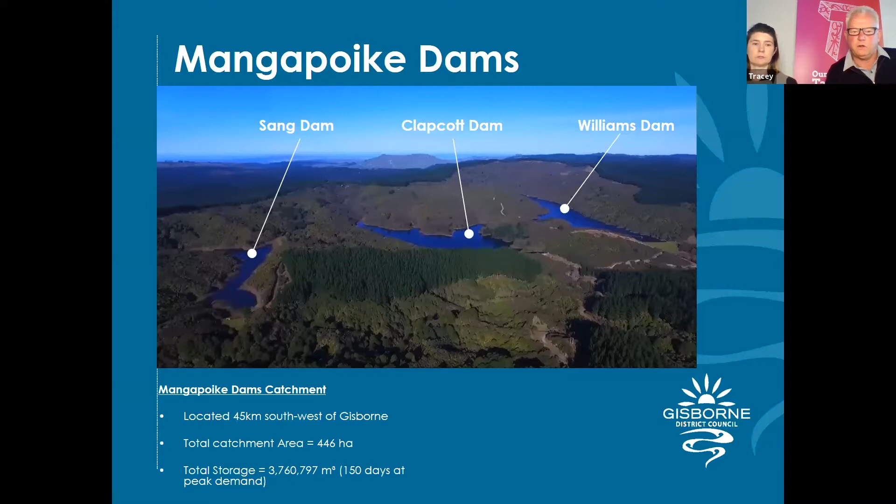Our main dams are the Mangapoike Dams. The Williams Dam on the right hand side is our largest. The Clapcott Dam is the oldest, and the Sang Dam feeds into the Clapcott. There's a total catchment area there of just under 500 hectares, mostly bush and mostly well protected.

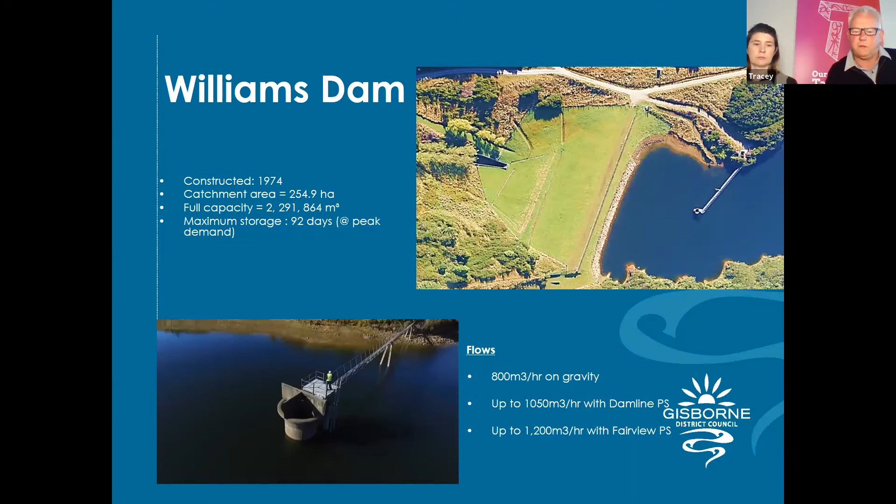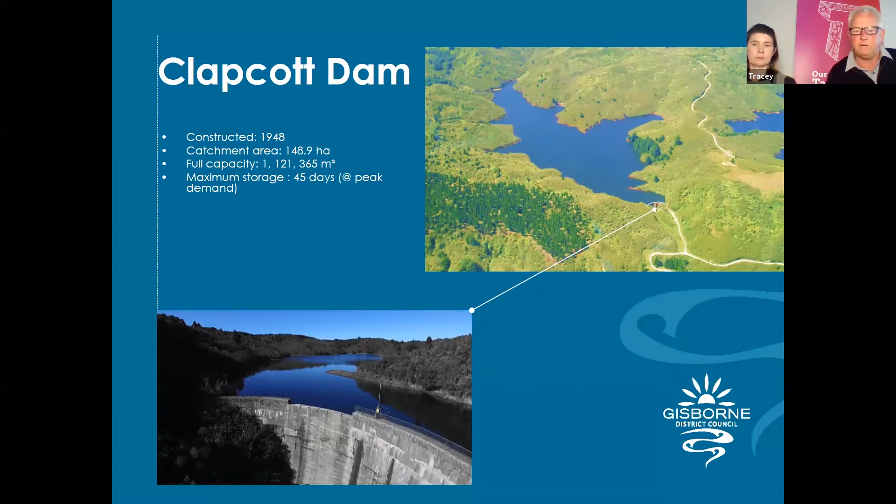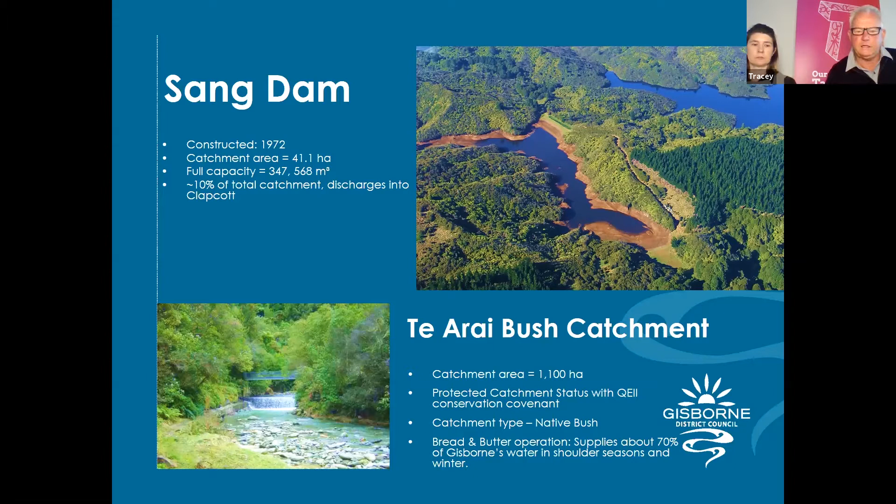The Sang Dam feeds into that dam, and has about 10% of the catchment. The majority of our water comes from the Te Arai bush catchment, which is a protected catchment with a QEII covenant on it. It's predominantly native bush, and that supplies about 70% of Gisborne's water. It does go dry in summer, and that's when we start using the dams and the other treatment area, which I'll move on to next.

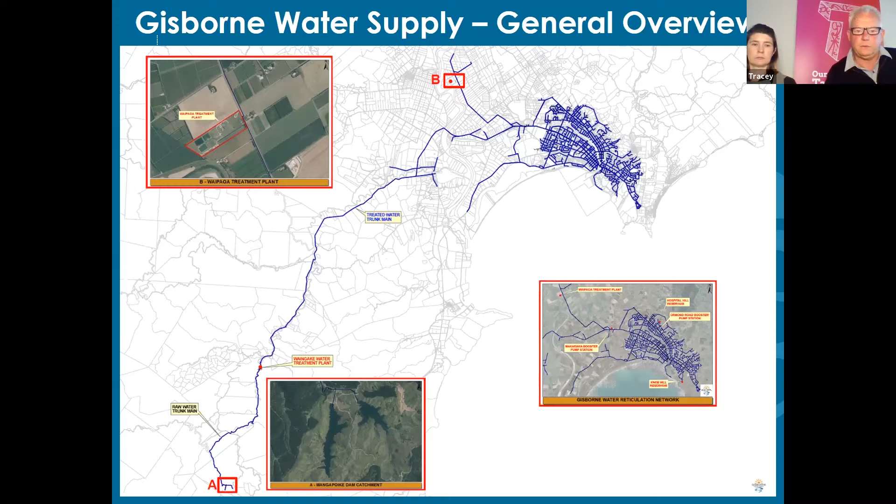So the first treatment area from the dams and the bush intake is the Waingake treatment plant. It was built in the 1940s. It was extensively upgraded after Bola in 1990 - we had quite a few issues after Bola, especially with the main line breaking into Gisborne. It supplies most of the water demand. It has different processes: clarification, filtration, coagulation, and there's also a chlorine input.

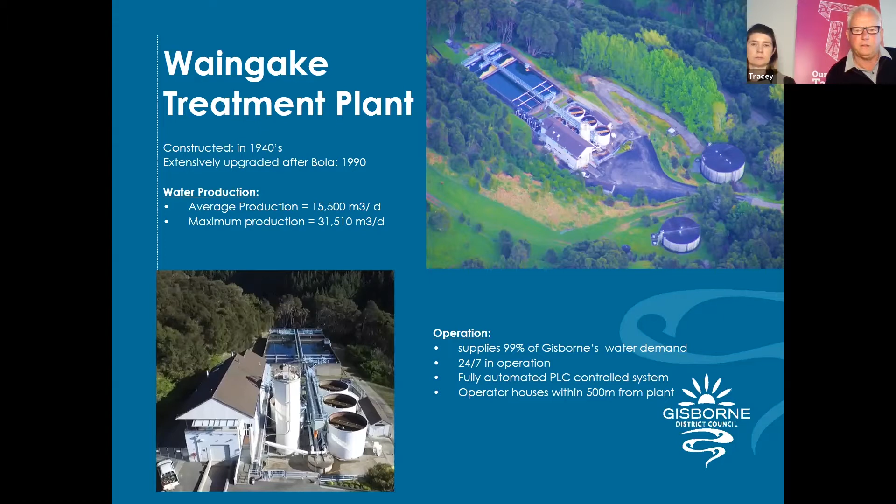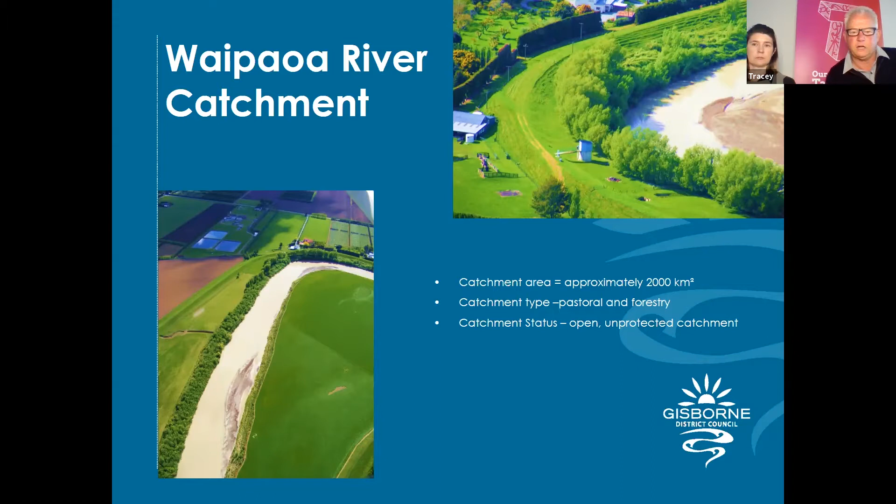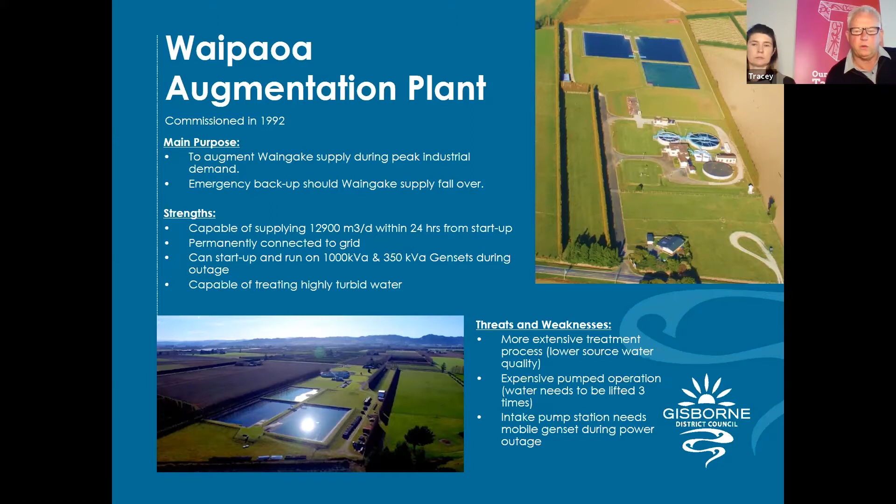There's another picture of the settlement ponds and the treatment building on the right hand side. Again there's settlement, filtration, coagulation, filtration, and we're currently installing a softening plant because the Waipaoa water is harder than the bush intake water.

And there's another reservoir on Knob Hill, substantially smaller, about a quarter of the size, still a substantial reservoir, and that's slightly lower so the water can flow into that reservoir.

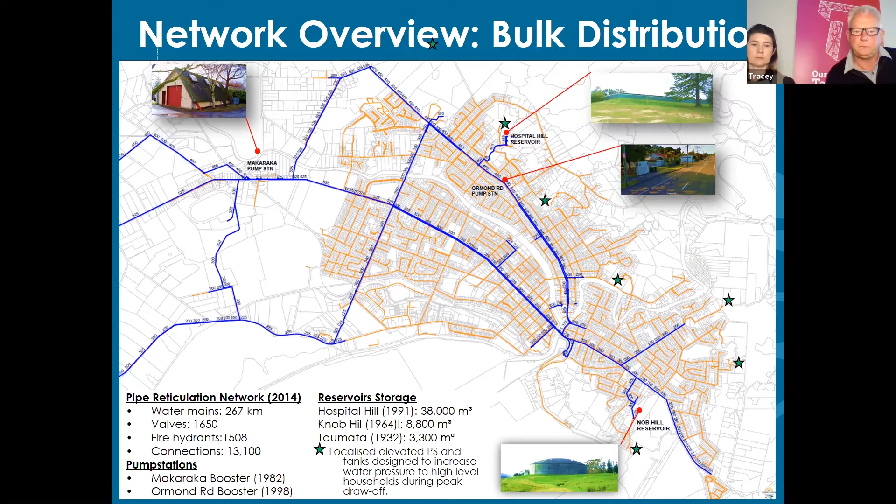Because we're an essential service, we have to supply water 24/7, and there's components of our network that could fail. So one of the big issues at the moment is the aging asbestos cement water lines - we have a significant amount of those, and they're slowly deteriorating and crumbling, so we get quite a lot of water leaks from those. We've got a progressive program of replacing them.

We prefer to use polyethylene pipe or PVC just because it's more ductile - it means it can move around a bit more if there's an earthquake without failing. As you can see, we've got quite a network of mains and rider mains, and quite a lot of valves, which are the dots in those pictures. So if anything does go wrong, we can isolate sections and still feed other sections of town.

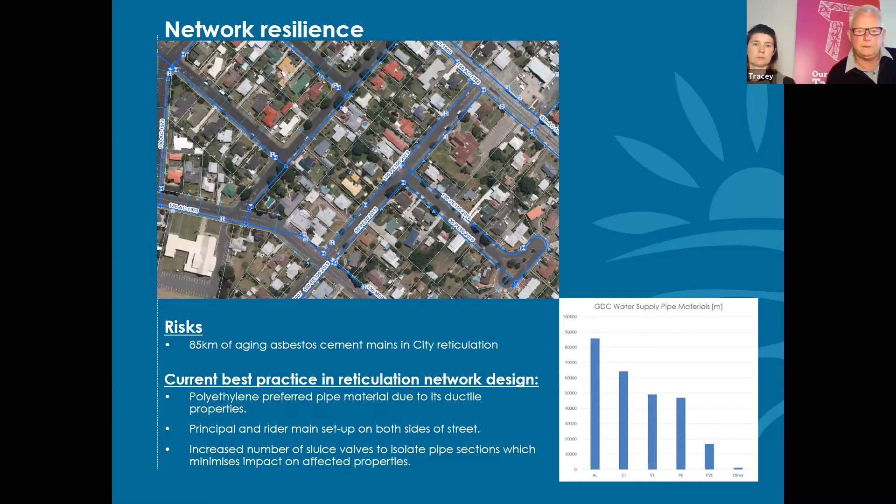In terms of resilience, we also have some interdependencies. If the roads are out, we have issues, especially that Waingake Road, but also Bushmere Road where the Waipaoa plant is. There are a number of bridges as well, and pipe bridges where we cross with our main pipelines, which are susceptible to flooding and scour.

We have an extensive generator network, gen sets, just to make sure that even when the electricity goes out, we can still supply water. Everything we have is on an alarm system, a SCADA system, and we use that for monitoring when things go wrong.

We also have fuel dependency because we've only got limited diesel storage at treatment plants. It was noticeable this year with COVID - big demand on diesel and petrol, and we had to work our way around that using our civil defence partners.

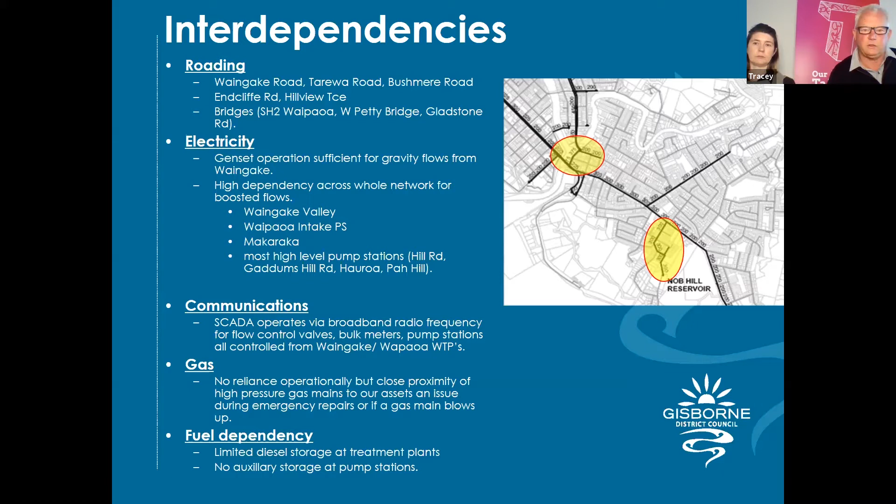That pretty much wraps it up for me for the water supply. You'll be able to ask some questions soon, and I'll hand you over to Wolfgang Kanz, who's going to talk about where some of the water goes.

Kia ora koutou. I'm going to be talking to you today about the DrainWise program, which is the council work program aimed at reducing how often we have wastewater overflows into the rivers in the city.

So why do wastewater overflows take place? In heavy rainfall, we have rainwater entering our wastewater system. As you know, rainwater is not supposed to get into the wastewater system, but in heavy rain events that does take place. When that rainwater gets into the wastewater pipes, those pipes get too full and can no longer convey that water to the treatment plant. The pressure builds up in that network, which means no more wastewater can get in.

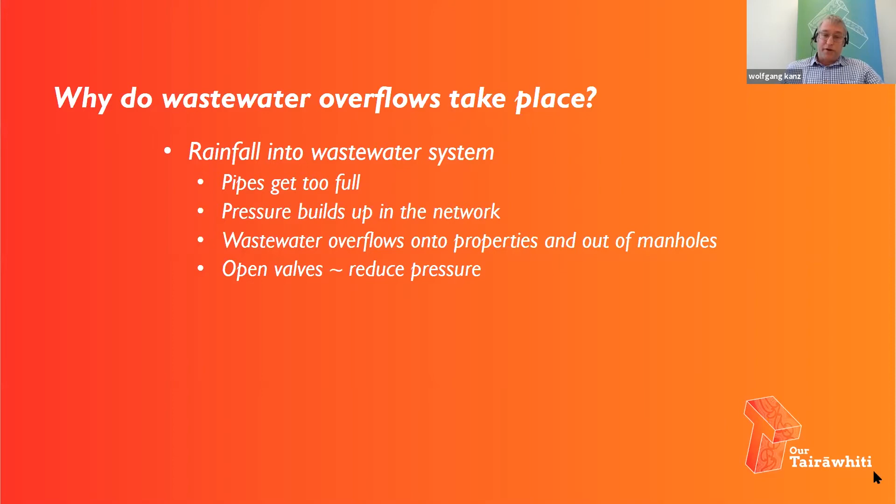So how often does it happen? It happens generally between 1 and 4 times per year, so up to 4 times a year.

Our target through this LTP process is to reduce that frequency of overflow from up to 4 times a year to once every 2 years. So it's a substantial reduction that we are aiming for.

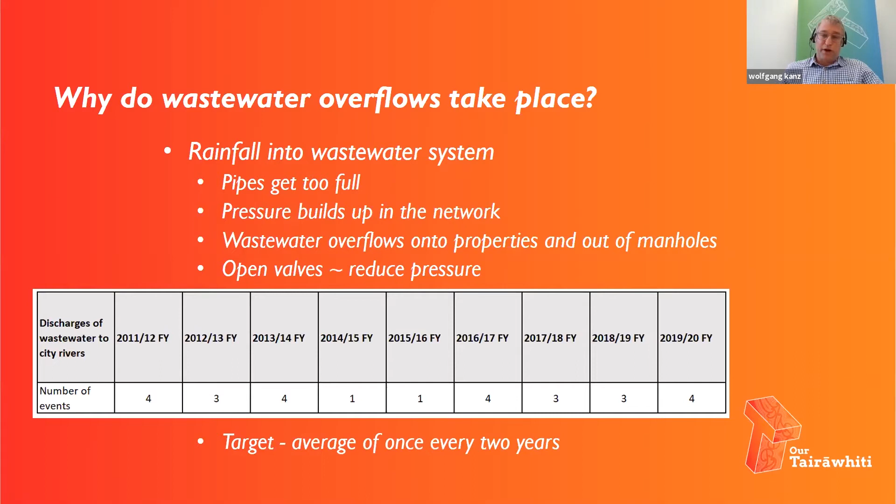So how does the rainwater get in? It gets in by 2 ways. One is inflow, and that's when the water flows directly into the wastewater system, so it doesn't pass through soil. It flows directly, for example, as runoff on the surface of the ground into a gully trap.

That's a direct inflow. The other way is infiltration, and that's indirect, because that is when the rainwater seeps through the soil and over a much longer period of time percolates down into the ground and then enters the wastewater system through cracks in the underground pipes. Inflow happens really quickly, whereas infiltration takes much longer because it takes quite a while for the water to soak through the soil.

This is an issue that is prevalent across New Zealand and internationally in all major centres and cities, and most cities have programs to reduce inflow and infiltration.

It is impossible to completely prevent any rainwater from getting to the wastewater network, or put it this way, it's practically impossible, very, very difficult.

And this is because we have asset renewal programs, which are based on age, and the oldest pipes get fixed first, which means that some pipes may be leaking but can't be fixed at any specific point in time.

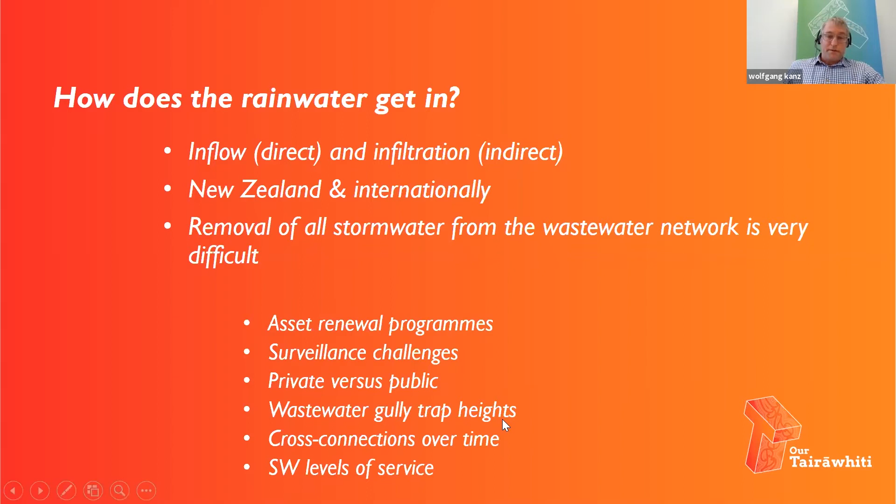So looking at this a bit closer, we've undertaken substantial modeling of the wastewater network to try to figure out how the rainwater is getting in, and we've backed that up with property inspections and other works.

And what is very clear to us is that the highest contributor to rainwater getting to the wastewater system is from property flooding on private property, and roof water being directed into the wastewater system through gully traps or lateral wastewater pipes. This is all direct inflow.

So on properties, we have ponding, and that water is able to flow over and into gully traps, or it gets into gully traps if they are cracked or otherwise broken.

The second highest impact is from leaking private property wastewater pipes, so that's the pipes that go from the house to the property boundary.

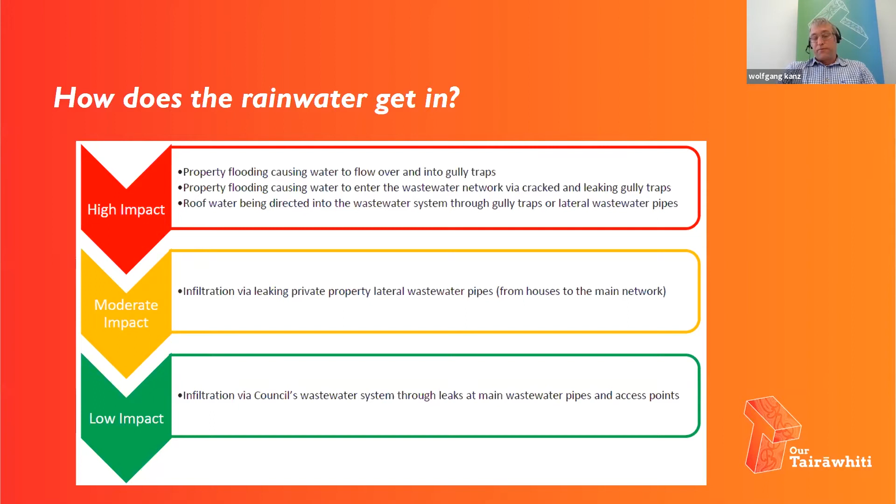And then the lowest impact is from the public wastewater system, and there we will have inflow, infiltration. We can have infiltration through joints or other access points. And this becomes a bit clearer when we look at this diagram here.

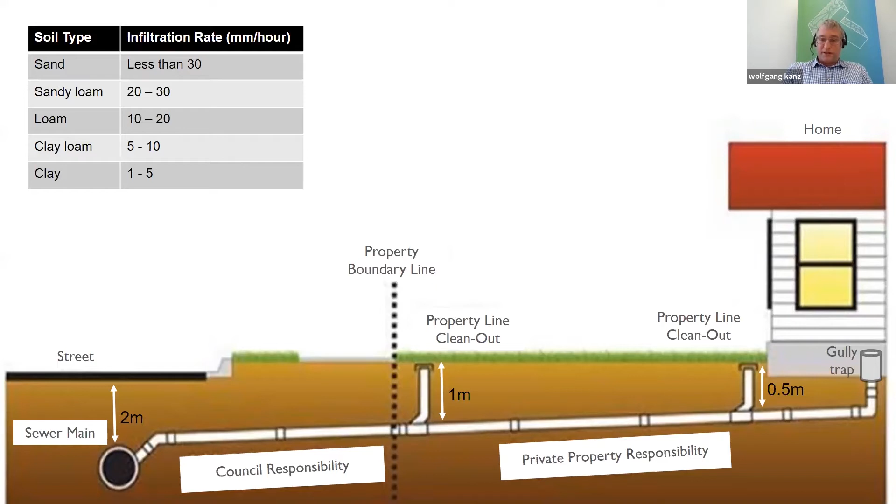Based on that, we've determined that the majority of the problem is located on private property, but at the same time council is investigating, maintaining, and renewing its pipelines to make sure that its network is adequate.

These are the sorts of issues we find, and we have a program of property inspections. As an indicator, out of all the gully traps we have inspected, more than half have had some error, some issue that has to be remedied. So the infrastructure on private property is really something we need to address.

What are we doing about it? There are multiple different activities in the DrainWise program we're rolling out to address these issues. One is an education awareness program, which hopefully you've all seen with the billboards and in the videos on our website, but there are a number of other aspects also, and you can find that information on the website at www.gdc.govt.nz/drainwise. You'll get a lot more information on all the different things we are doing to reduce the inflow infiltration.

Finally, our target, as I mentioned, is to reduce overflows from up to 4 times a year to an average of once every 2 years. To achieve this, we will need to work closely with the public to make sure we are able to fix both the council-managed and the privately managed aspects of the wastewater system.

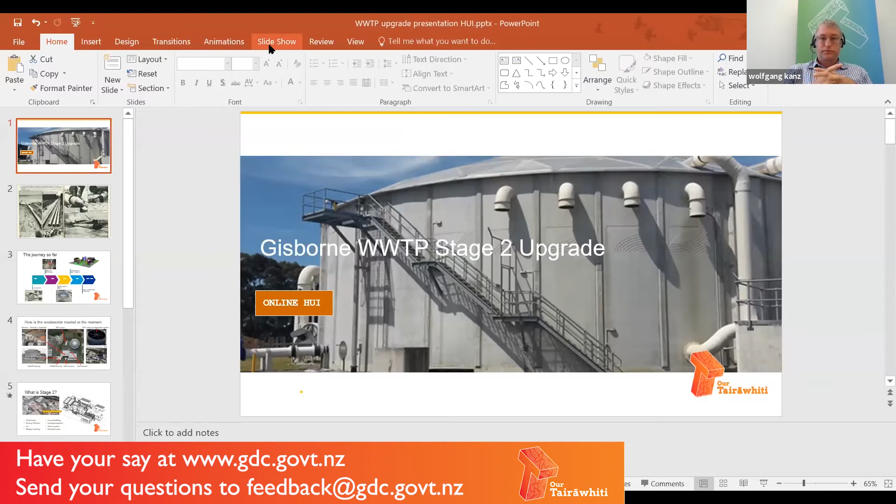Kia ora everyone. So I'm talking about the wastewater treatment plant today, and what we have in the long-term plan is the wastewater treatment plant stage 2 upgrade. So that is what we're talking about today.

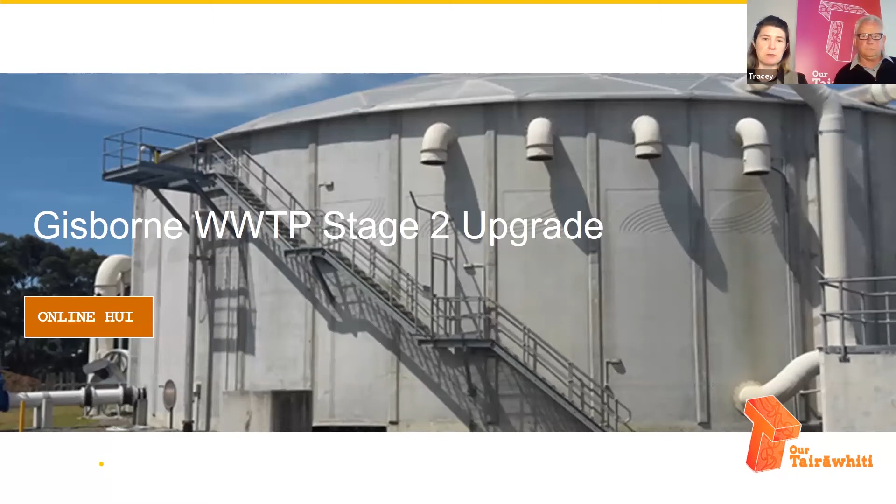So what you might be aware of is we've got an outfall that goes 1.8 kilometres out from the beach. The first section was a 1,500 foot section that went out, and then that was extended later on. So this was put in, it was quite a bit of engineering at the time to get this in place.

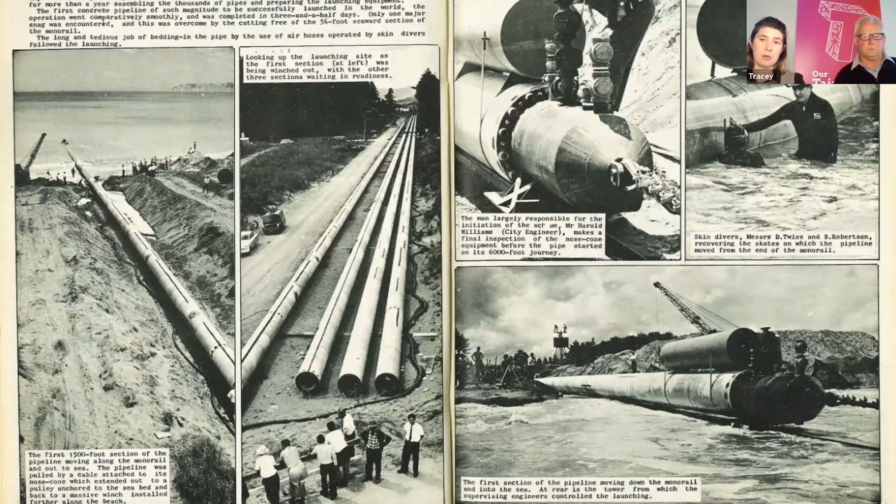So we've been through a bit of a journey, and that's where our current wastewater is disposed of post-treatment. So that pipeline was put in 1964.

So the interesting thing is before then we were actually on septic tanks and on-site wastewater even within the city boundary. And another interesting fact is right up into the 1980s, we still had night soil collection here, which meant that while water was being pushed into the backyards of people, the solid wastes were being taken away still. So that was quite a long change to get everything changed over to being put through milli screenings, which also happened in 1990.

So over that period, more and more of the city was actually connected to a network which was combining to come to what was the milli screen plant at the Stanley Road site, which some of you might remember.

And then 10 years ago, commissioned in December of 2010, we had the wastewater treatment plant stage 1 site, which is at Banks Street. You can see our biological trickling filter, which is the main aspect of our treatment at the moment, is in the middle there, and that is obviously during construction.

So going forward in the LTP, we've basically got the stage 2 design that we are currently working our way through, and were hoping to be commissioned by June of 2022.

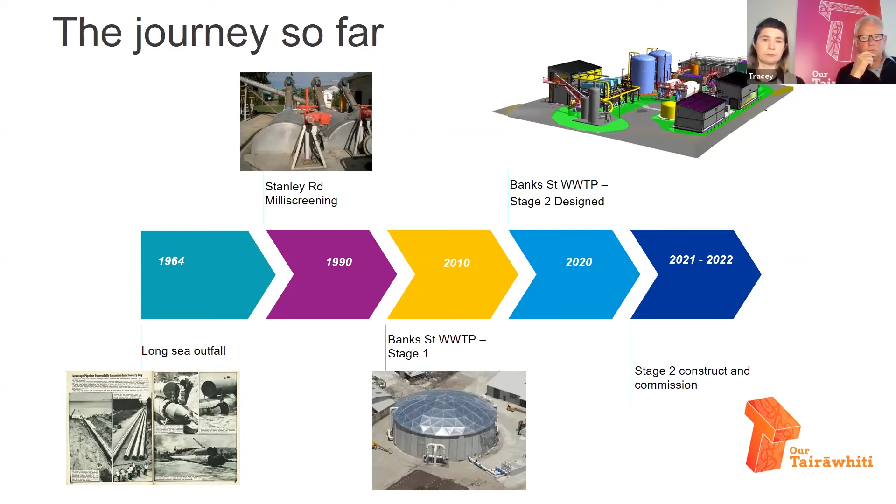So how the wastewater is treated at the moment is that the wastewater comes in. We've got 2 different streams coming through. We've got the major industry separated line, which basically comes treated from the industrial sites through a screening process and then gets combined with the treated domestic waste and goes out to the sea.

And we've got the domestic waste which comes in. It is pumped up through some screenings process, then it goes through into some grit removal. Then it goes across to our BTF pump station, or biological trickling filter pump station, up and over the BTF where it gets recirculated, and then that goes out to the outfall pump station, which then gets pumped out to that outfall at 1.8 kilometres out to sea.

So these are pictures taken of the current site and of the inside of the milli screening hall. That's the one on the top left. And you can see the inside of that biological trickling filter as it was during construction on the top right hand side. So it's quite interesting, and that was built over just over a year, so it was a very fast build at the time.

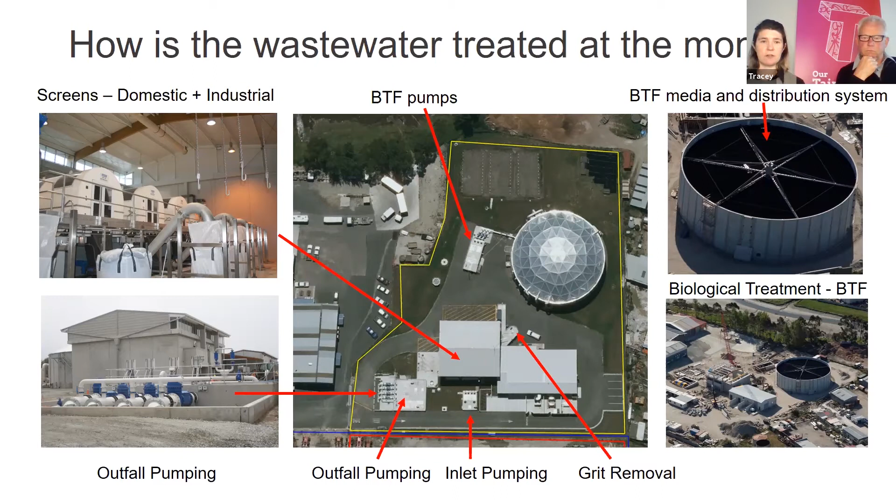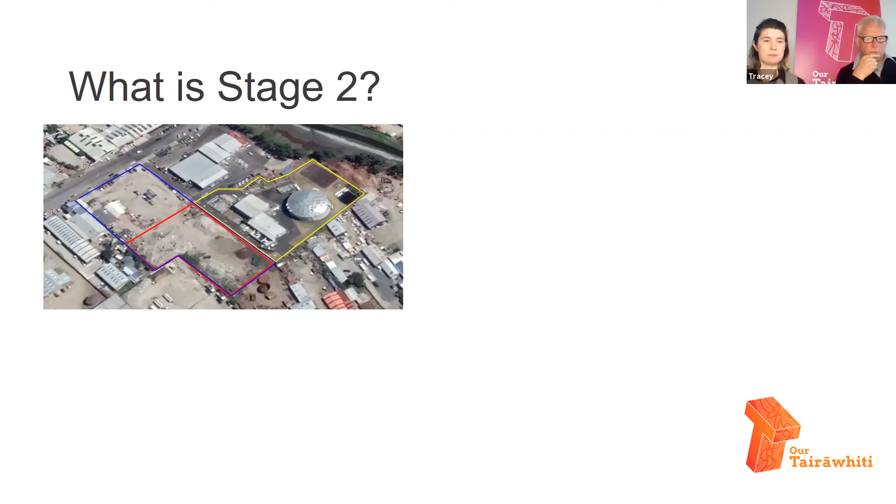So the stage 2, you can see a little picture or diagram of what that's going to look like. The reason we're doing the upgrade is to make the discharged water a much better quality heading out to the marine environment. So that's going to go from our current biological trickling filter over into clarification, some tertiary filtration, and then UV disinfection, or ultraviolet disinfection. That will then be the water that is being discharged.

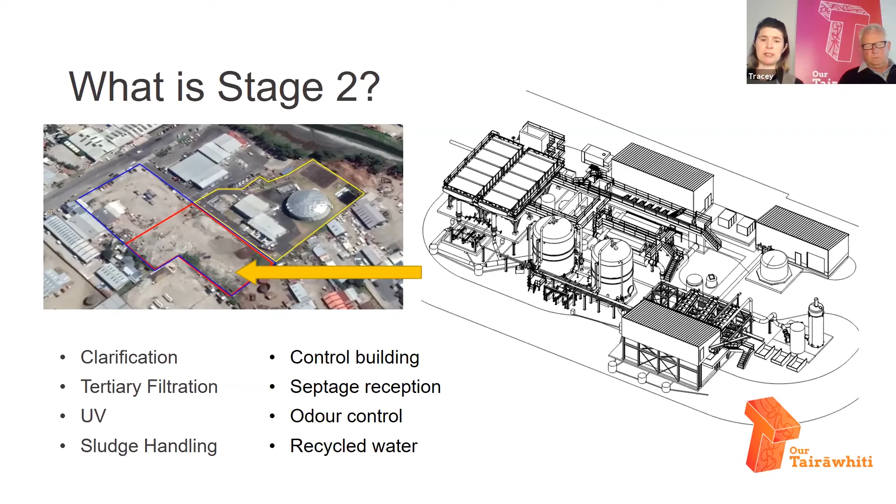There'll also be sludge handling, an upgrade to the septage reception, some odour control, and we're going to be using recycled water rather than potable water. So that'll be a much reduced water intake for the treatment plant, and obviously mean that we're not using some of that potable water just to clean things that have been dirtied with wastewater.

So whilst the colours will not stay the same, this is what it'll look like. From the top right, that's the clarifiers where that'll come through. Then you've got the two whitish boxes in the middle, which are the tertiary filters. Then it'll go through a UV, which goes along behind this building here, and that goes out to sea.

So the solids from this clarifier and the tertiary filtration will end up going into these holding tanks, which will then pump through these sludge thickeners. And they will end up providing a solid waste, which is primarily made up of the worms and snails and algae that is in the biological trickling filter treating our waste.

And so those will go into containers or into a truck, and that will go for disposal. So this is the screens handling sludge hall, which is on the left-hand side of the screen, in case you can't see my cursor.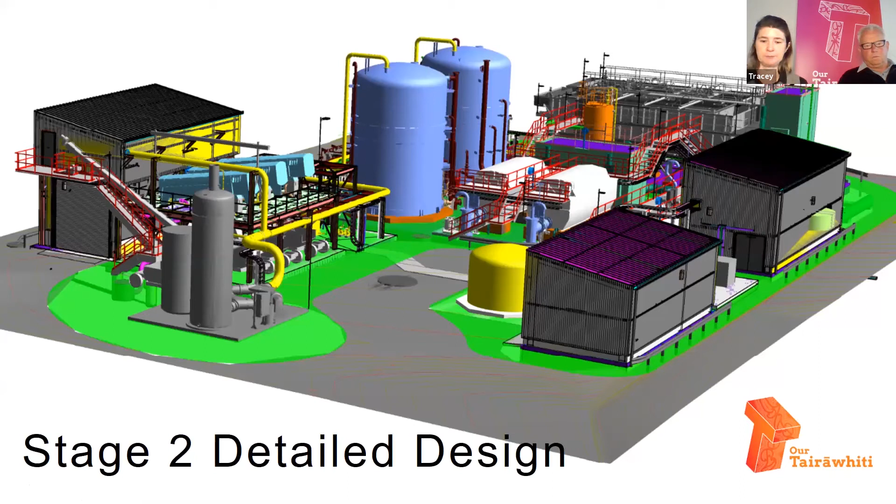So this process has already started. We've gone through quite a bit of the design process, and we've gone through early equipment procurement. So the orders for these have been submitted, and so these are either in the stages of being constructed, or they're in the process of being sent to Gisborne.

This shows just a slightly different look at the insides of what these look like. You can see there we've got the clarifiers, which is a lamella type clarifier, tertiary disc filters, some UV disinfection, and then the sludge dewatering process. And obviously some extra pumps, because we need to be able to move it from one place to another.

I think the combined cost of just the early procurement was around the $7 million mark.

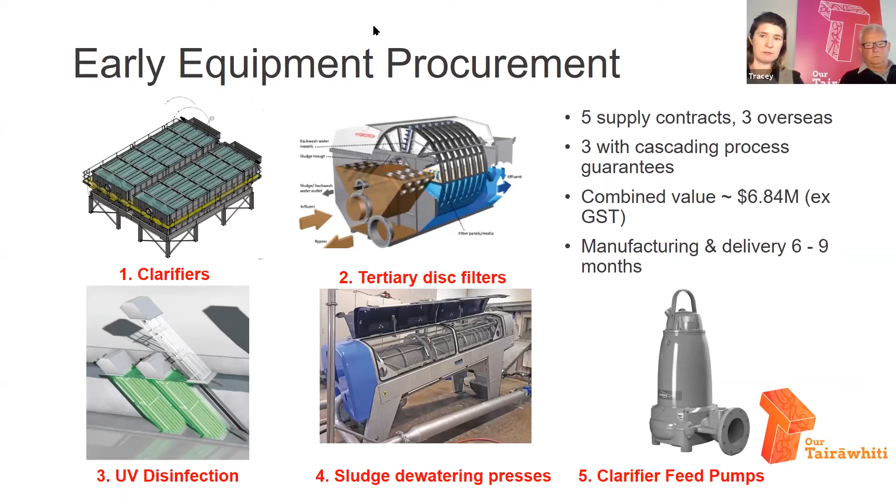So one of the questions you might want to know is how clean will the water be at the end? There's actually significant reduction going through the current biological trickling filter, but this will make it much, much better. We're looking at having 3 log reduction, which is basically taking our enterococci levels under 1,000 CFU per 100 mil, colony forming units. That's quite a low amount for wastewater.

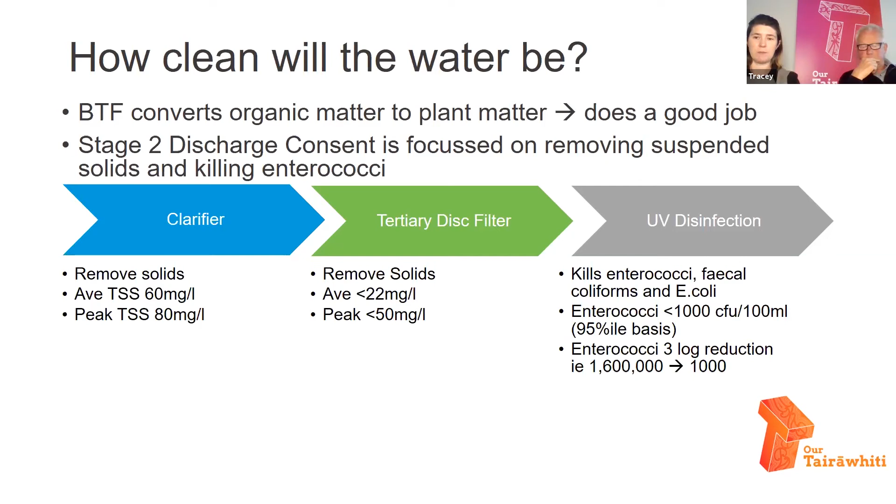And obviously these solids will be much, much lower as well. The solids did need to be taken out to be able to do UV disinfection, otherwise the UV disinfection wouldn't work. So the amount of solids now going out in the wastewater will be much reduced.

So we are out for construction. We've got registrations of interest, which are going out next month or the month after. We're looking at having a tender out for Christmas, construction starting early next year, and then operation by June 2022. This is actually quite a tight timeline given the size and scope of the project. It's at least the same size as the current site and will cost around $30 to $35 million at its current costing.

So that's it from me. I'll open it up for any questions.

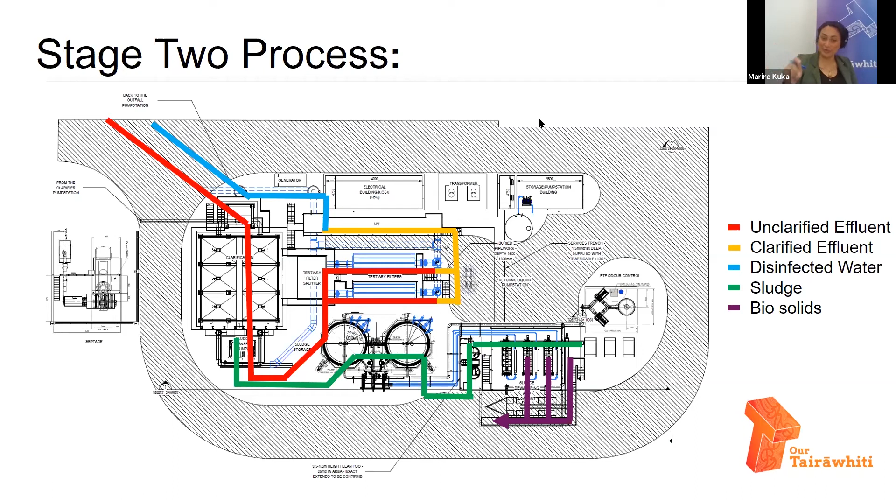I do have a few questions from the email though, and this first one is for you, I imagine, Chris. One of the things we're asking about in the long-term plan in this early engagement phase is about drinking water, and whether or not our residents want us to apply more money to that, or do the same or do less. What is council doing to protect drinking water security in the long term?